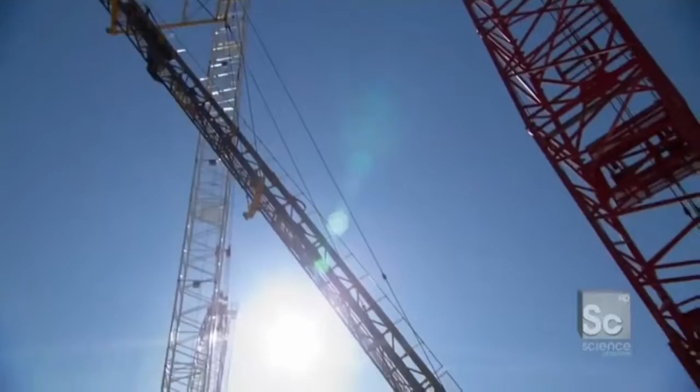Prior to Katrina, this wall was the only line of defense that those residents had. It was the primary line of defense for hurricane storm surge. Tell me what's different now. What's different now is we've taken a step back and looked at the larger New Orleans area, and we've actually moved the primary hurricane defenses from this location to areas 8 miles away.

8 miles from downtown New Orleans, they're building this. A 2-mile-long, over 150-foot deep flood wall that is fundamentally changing how New Orleans will fight hurricanes. It's unlike anything ever built. The largest surge barrier in the world, nicknamed the Great Wall of Louisiana, designed to hold back over 44 million gallons of water from an oncoming storm.

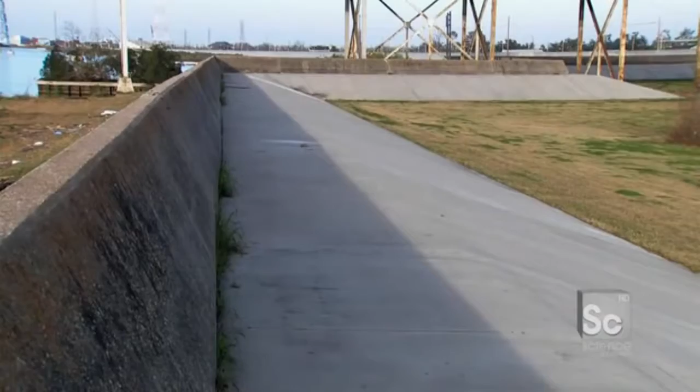Prior to Hurricane Katrina, stormwater flowed into New Orleans and was met by a 350-mile network of earthen embankments called levees. Located just 100 feet from people's homes, they held back the water, keeping the city dry. But when Katrina hit, the system was so overwhelmed by water, the levees broke in 50 places, flooding 80% of the city in just 5 hours' time.

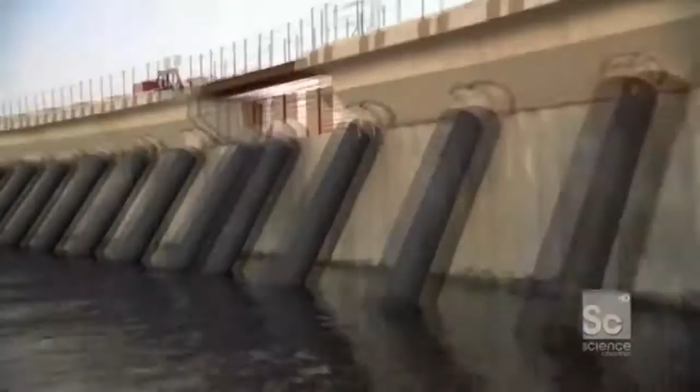To avoid this disaster happening again, the surge barrier is being built miles away from downtown New Orleans, where it can stop the water before it enters the city. Instead of waiting for the storm to come to them, for the first time, they are taking the fight to the storm. Is this a new way to think about battling hurricanes?

Nowhere in the world have we built a wall trying to keep out 25, 26 feet of water. No one's ever done it before. And this height here on a storm surge is unique. You gotta remember, the hurricanes that come to New Orleans are bigger, meaner, and there are more of them.

To hold back a 26-foot wall of water, the barrier is fortified by 628 batter piles. When the storm surge hits the wall, what pushes back and keeps that wall upright and strong are these guys right here. They're called batter piles, and they're basically 288-foot-long steel tubes inserted into the back of the wall that support it and transfer all the loads of that storm surge into the foundation.

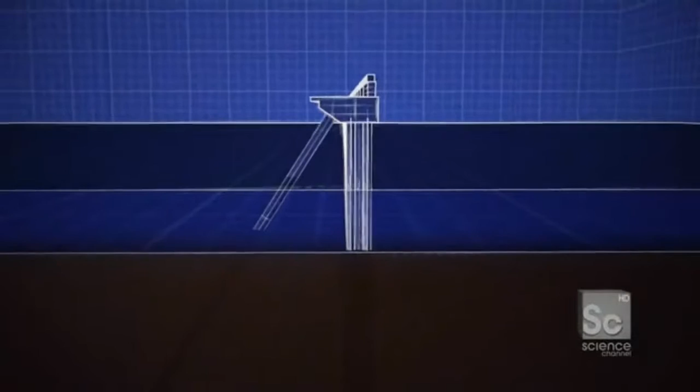Since there's no bedrock to hold the pile in place, over 80% of the wall is actually below the mudline. The deeper the pile is driven, the more friction there is to hold it in place. Each pile is almost as long as a football field and placed at an acute angle for added stability.

What'll be interesting about this lift is that this pile right here is horizontal, right? But in the end, we have to get this thing at a 57-degree angle to feed it into the machine called the leads. No one has ever attempted to drive piles this size at an angle before.

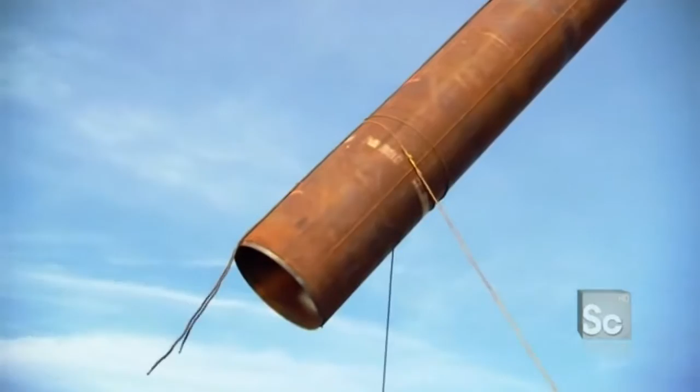To accomplish this engineering first, the Army Corps invented a massive 1,000-ton machine called the leads. Unlike traditional pile drivers that can only hammer vertically, the leads can hammer the piles at a precise 57-degree angle. And with 4 chutes, they can drive 4 piles in a row before moving on, saving almost 5 months of construction time.

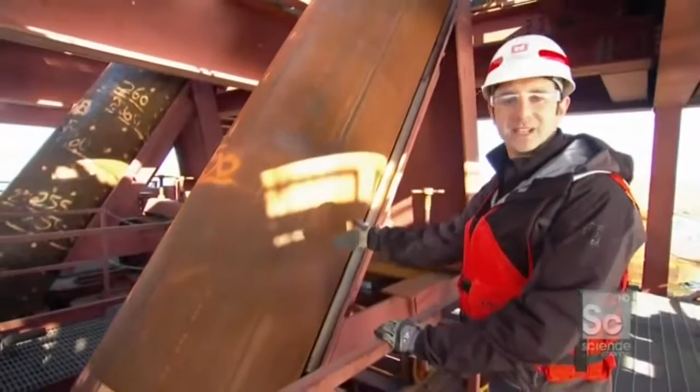So here it is, lowering it through the leads, right? The thing that's leading it right down this 57-degree angle, getting into position so we can start knocking this straight into the ground. Even the leads isn't big enough to handle a 300-foot-long pile in one go.

So they're driven in two sections. The first section is 158 feet long and weighs more than 13 tons. So Mike, as I'm looking at this slowly creep down into the earth, this is just sliding into the soil below, right? Into the mud, yeah.

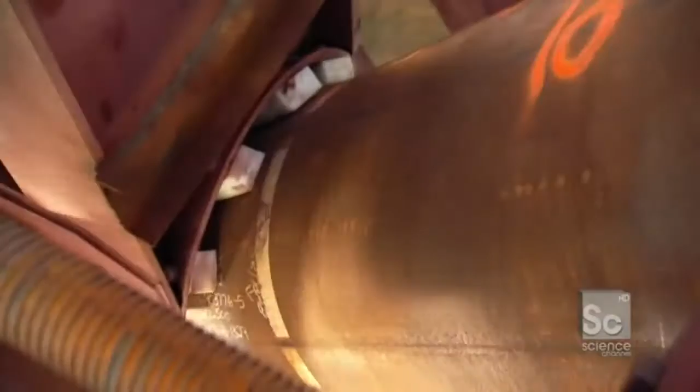I mean, there's really nothing down there, huh? Not much. I mean, it's soft. It's so soft that the pile sinks 38 feet in a matter of seconds under its own weight. After that, the friction from the mud becomes too great, so they have to use a hydraulic hammer. Do I run that hammer down? Absolutely. Time to drive the hammer.

So it's your job to control how much force this thing hits it, when it hits it, and how you drive the pile down. That's it.

So before sun sets today, we're gonna start smacking this thing and send it in? Right now, the next 2 minutes. Everybody ready, got the earplugs on, let's go. Let's do it. I got earplugs. I'm on. Let's start smacking it.

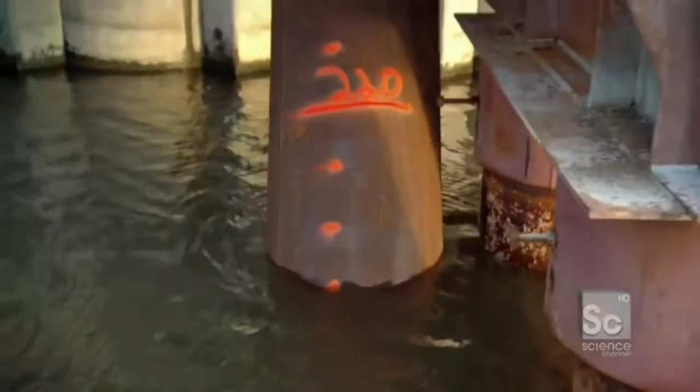So every time that smacks the pile, that pile gets pushed a little deeper into the ground. During the first 158 feet of driving, each blow moves the pile 10 inches. But as the pile goes deeper and friction increases, it takes 40 blows to move the pile that same distance.

So Mike, the first piece is now in place. Right. And now they're gonna bring over the second piece, which is that one right there.

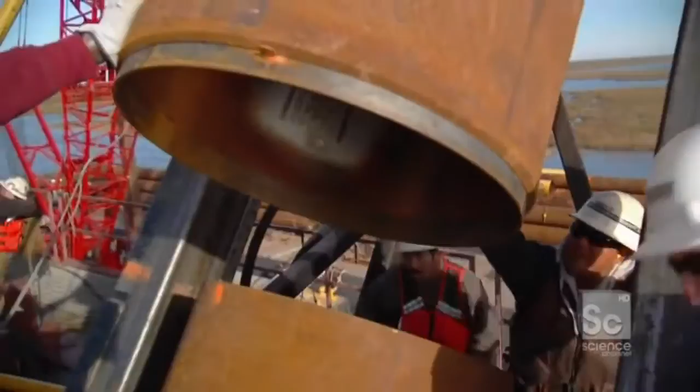Loading like a rocket launcher almost. They have to get the piece in, tamp it down, and line one end up with the next. Line it up, line it up! All right, so here it is, it's coming down. And you can see we're basically gonna fit this piece into that piece, have a little bit of an overlap, and that's what they're gonna weld together.

So if you look right there, you can see the weld's been completed. Those two separate pieces have now been spliced into one, and now that pile is 245 feet long. The weld looks good. Yes, sir. We're ready to drive it, put it on the ground. This is the last time we're gonna see this pile in the air.

So let's flip the hammer on and start smacking. Smacking it. Are you ready? Yes, I'm ready. Whenever you're ready. I'm ready. I was born to smack pile.

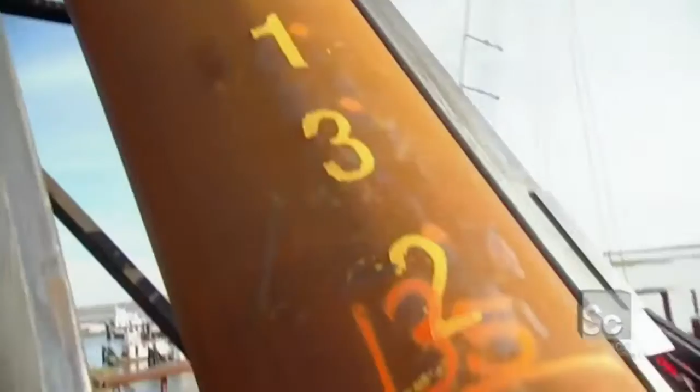It takes around 1,200 blows to get one batter pile into place. And to stay on schedule, they need to install 628 of them in just 6 months. A total of about 750,000 blows. Normally, a project of this magnitude would take more than 17 years to complete. To make New Orleans safe as quickly as possible, the Army Corps is attempting to finish the surge barrier in just 3 years. To pull off this incredible feat, this crew has to work through hurricane season.

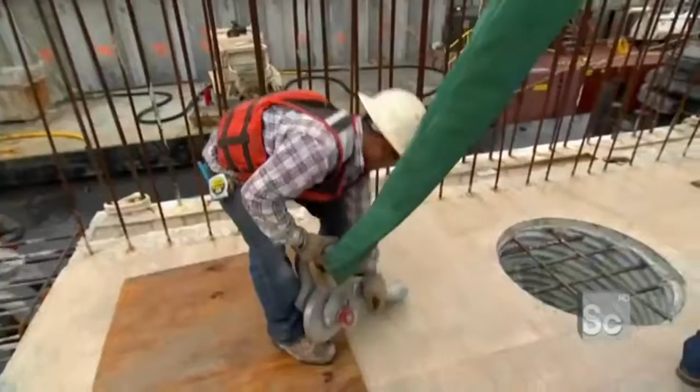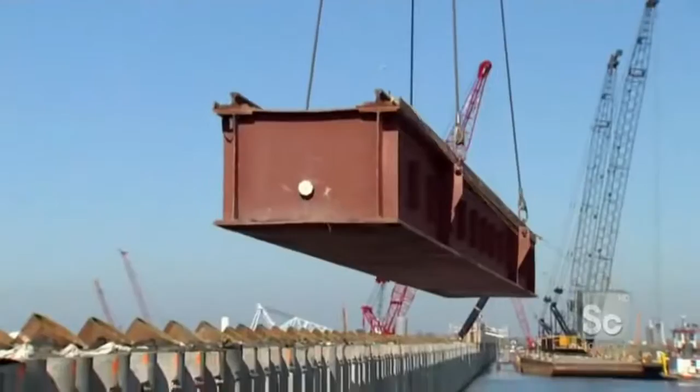So engineers came up with an innovative solution to get the job done right and done fast, even in rough waters. One of the biggest challenges when you're working in the middle of a lake is having a level surface on which to work, because barges move and tugboats pitch and roll as well. So in order to have a flat surface to accurately work, they developed that system right there called a trestle. It's a semi-permanent track that moves along with the wall construction. A trestle is basically a huge railroad track anchored into the lake bed, providing a stable workplace for large machinery.

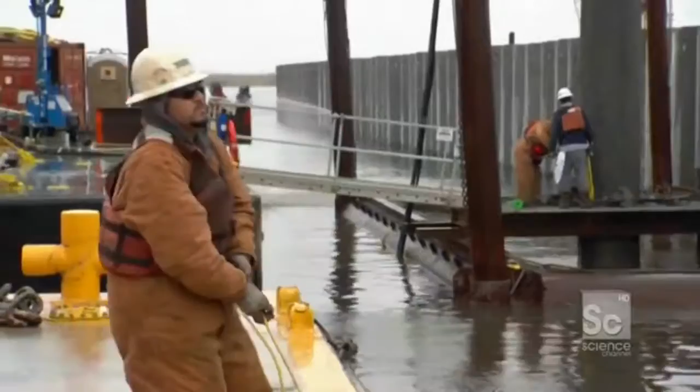The project has 1,000 feet of track for the entire 10,000-foot-long wall. So to keep construction moving forward, the trestle team has to leapfrog 50-foot sections from one end of the site to the other, up to 6 times a day. 50 feet of trestle track's about to go from this barge up in the air and extend our construction platform another 50 feet. Each trestle segment has to be aligned seamlessly with the existing track. The gap can be no more than 3 millimeters, or about the thickness of a shoelace.

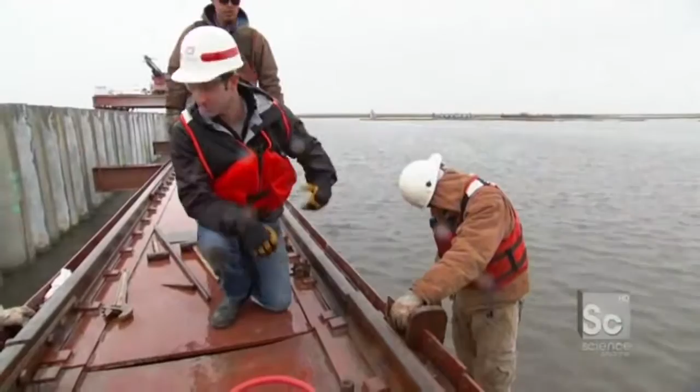Okay, so now that we have the trestle track, generally speaking, in place between the two beams, let's walk on the trestle. I'm standing on the pre-existing trestle track, and this right here is the new piece of track. As you can see, we have a big gap. We'll use this plate right here to put it on either side of the track, put the bolts in, and bind the track together.

6 bolts need to be in place to ensure a solid connection between the trestles. The issue is we have 5 out of the 6 bolts lined up, but one side is slightly higher than the other, so we're having a problem getting in the final bolt. The holes are about 3 millimeters off. In order to make that space to get it through, we're going to torch it out.

Would it not have made sense for me to move before he started? And on the plus side, it's really cold and rainy. My right hand is much warmer than it was a minute ago.

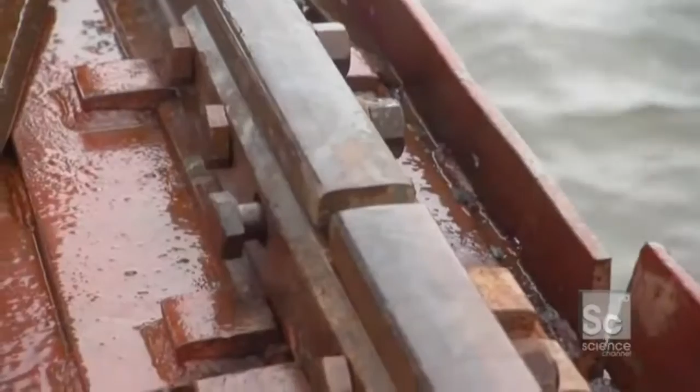Well, after cutting, torching, and hitting, and just generally some emotional consternation, the sixth and final bolt, give her a smack, is through. This track has now been extended 50 more feet. The construction site will extend. Can we go home? We're finished now?

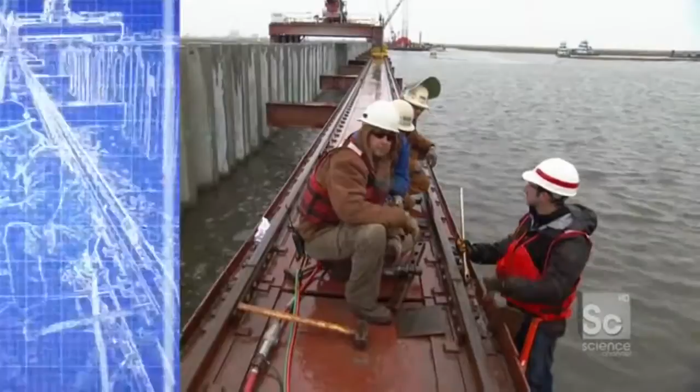Up next, building new lives and new hope in the 9th Ward, with houses designed to fight back against the worst Mother Nature has to offer. These houses are being built to survive another Katrina.

When you think about what took place in New Orleans, you of course think about Hurricane Katrina. But the truth is, the actual damage that took place wasn't from the hurricane, but rather from what the hurricane created, something called a storm surge. A storm surge is a wall of water pushed out in front of a hurricane by high winds and low pressure. During Katrina, it caused waters to rise more than 20 feet, overwhelming the existing hurricane protection and flooding almost the entire city.

Katrina's storm surge was responsible for 90% of the destruction in New Orleans. And hardest hit was one of New Orleans' poorest neighborhoods, the lower 9th Ward.

I was actually here filming 5 years ago, right after the event, and it was harrowing. There were houses that were just blown clear off their foundations. Others were torn in two. I saw a house that was actually sitting in a tree.

5,000 homes were lost in this neighborhood alone, and less than 20% of its residents have come home to rebuild.

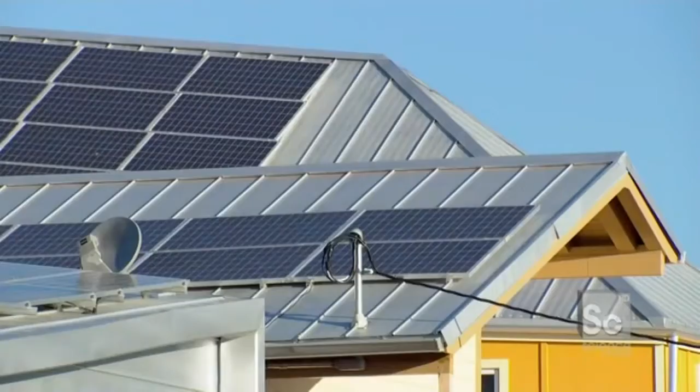It's incredible, it's an amazing project. No matter which aspect we look at, there's something incredible going on. These homes are re-engineering the lower 9th Ward and transforming it into one of the most hurricane-resistant neighborhoods on the planet. But one of their biggest challenges isn't wind and rain, it's the ground itself.

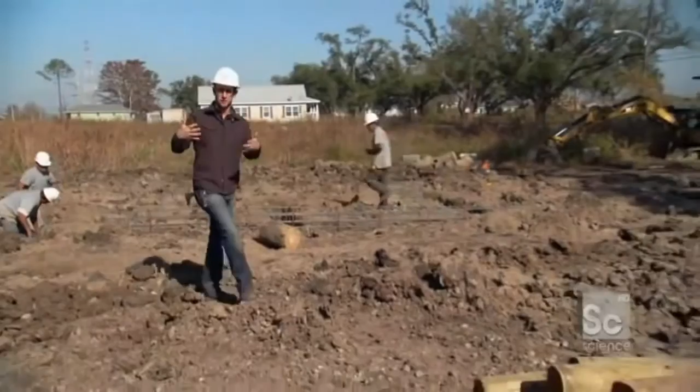Like most of New Orleans, the lower 9th Ward is built below sea level, which basically means the ground below me is a big swamp. You build a house here, over time, it's going to sink. So to prevent that, the Make It Right houses begin construction by driving these massive 40-foot-long piles into the earth.

This is what they had before Katrina, and this is what they're getting right now. Right, exactly. So these are built to last. These houses are built to survive another Katrina. These piles are revolutionizing how homes are built in this flood-prone area.

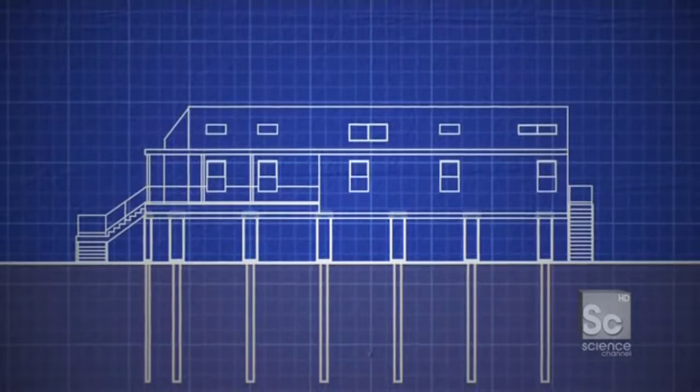Previously, homes rested on top of cinder blocks. When a flood came, the house would be lifted off the blocks and sent crashing through the neighborhood. But now, these wooden piles stabilize the soft soil so it can support a raised concrete foundation. It actually attaches to the house, strong enough to keep the home in place, even in floods more than 12 feet high.

Chris, how do you get a 40-foot pile rated to carry 7 tons into the swamp? You use that machine over there, called a sonic side grip vibratory driver that puts out 50 tons of centrifugal force, and it'll push that pile underground in about 2-3 minutes.

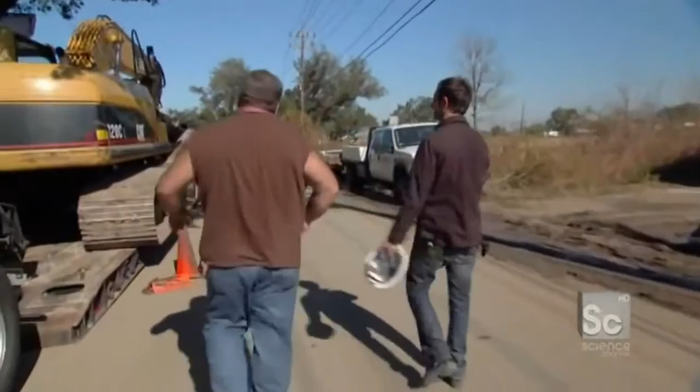So this is it, huh? This is the machine. It's like a construction action hero. My God. Tony, why don't you spin her around so we can look at her? This has got a kind of a Mad Max Beyond Thunderdome vibe to it, you know what I mean? Yeah, I never get tired of watching it work.

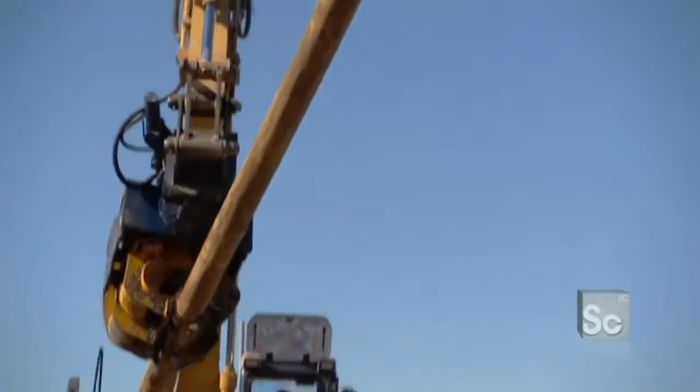No one has ever used a pile driver like this to install foundations in the lower Ninth Ward. Its unique articulating arm can grab, lift, and drive the pile all in one shot. The work gets done 3 times faster than if they used a conventional pile driver. Grabs it by eye, swings it into place like it's his extended arm, puts it right down in a matter of moments. Tony says the only place he really feels at peace is in that machine. You can kind of see that too, right? Yeah, oh yeah. To lift and move a pile requires careful coordination of 6 controls all at once.

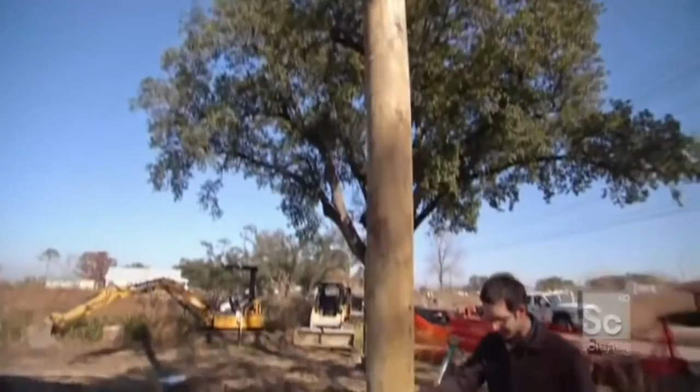Tony's located the pile right in the corner of the foundation. We have a little circle mark for him, and he's just gonna put this thing dead smack. Perfect. He's lined up, he's level. Now it's time to vibrate. Tony, you ready?

You literally feel the ground shaking, within like a 5-foot radius around Tony's workings—like my feet, my toes, my back. I'm itchy right now from the vibrations running through me.

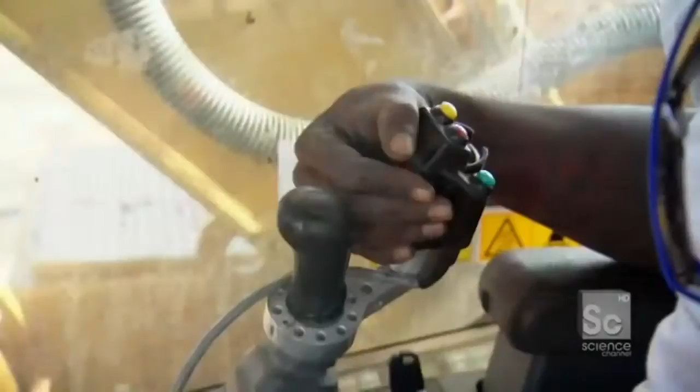So now what I'm standing on, even before the foundation gets here, is 40 feet of pile below me. And it's from this point the house now begins.

Is it hard for a rookie? The hardest part's picking the pile up. Let's give it a go. I'm gonna drop some piles. Okay, so you're Tony. Yes. I'm Danny. Nice to meet you, Dan. How you doing, man? I'm okay. We're gonna switch jobs. Yeah, you do the yelling and walking around and talking and not doing anything productive. Sounds like a winner. And I'll do the work. Sounds like a plan. All right, Tony.

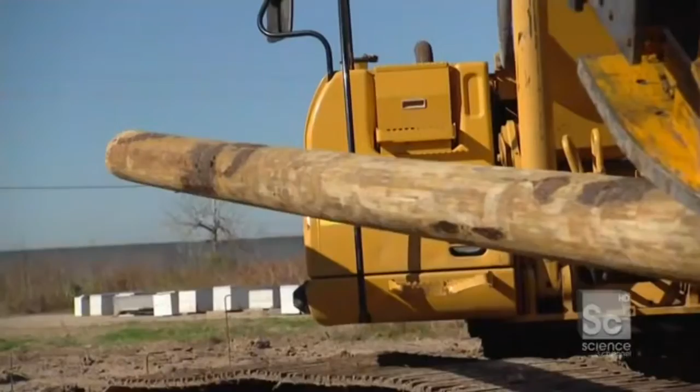Swing your left over. Oh! So close, it was like I'm about to eat it. It was like, oh, here we go. Open, open. It's like playing the violin. Come here. Oh! It's in my clutches. It's coming up, I got a good grip on it.

Chris, watch this, man, this is gonna be a little piece of magic. Can't beat that. How's she looking? First time out, that's not too bad. Now tell me something, you're from here, right? Born and raised here. So regardless of the next event, next storm, if it happens again, you come back? We're coming back, this is home. This is life, this is reality here. I come here sometime with my kids just to show them the houses, you know? This is what we doing. We bringing people home. It's good stuff. Thank you, man. It's amazing.

Up next, putting together the strongest wall ever built, and we're gonna literally thread the needle in some of the worst soil conditions in the world.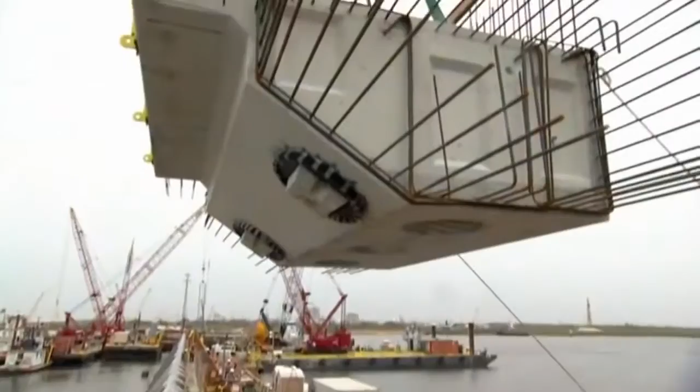Since it was founded in 1718, New Orleans is a town that's been working against the elements, primarily because 80% of this place is located below sea level. But for the first time, New Orleanians are trying something new, working with nature instead of against it.

New Orleans is built on top of a giant marshland, which for millions of years naturally absorbed thousands of gallons of rain and floodwater. Today, most of that spongy marsh is covered by pavement, causing significant problems for this flood-prone city. In a typical situation, when it rains, what happens to that water? How does New Orleans deal with it?

That water runs off, goes to our curb and gutter, goes about 8 blocks to the north of us, and is pumped over a levee at about 2 cents a gallon. That's expensive, it's time-consuming, it's a problem if the pumps fail. It's not sustainable. And frankly, relying on the pump station, relying on the city hasn't always worked so well for these citizens.

Over half of New Orleans is located below sea level. This paved city is basically a big bowl. When water comes in, the only way to get it out is with pumps. So when the pumps failed during Katrina, the lower Ninth Ward was left underwater for more than 3 weeks. We're in a situation where our community has a real fear of water, and it's a valid fear of water.

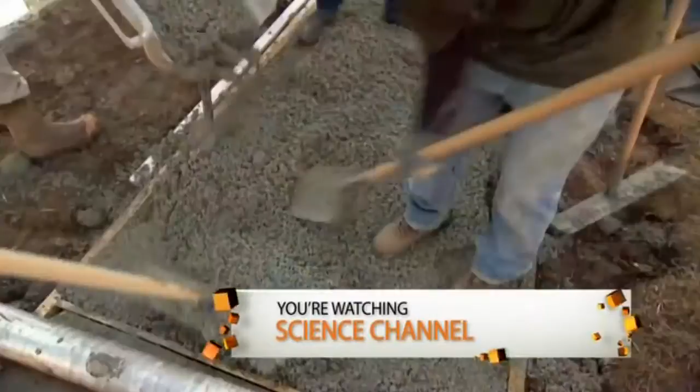The folks in this neighborhood have a different mindset on water, and we're trying to change that paradigm. To make sure this neighborhood is not left underwater again, engineers have found an innovative solution to radically reduce the need for pump stations, called pervious concrete.

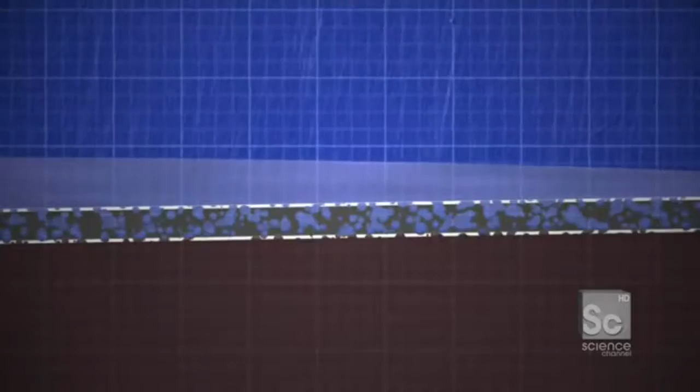As water runs off of our site, it does the opposite of what typical pavement does. Instead of a giant table that tilts water and flows it to the curb and gutter, this is a giant sponge that accepts rainwater, stores it in the concrete and below, and doesn't hit the curb and gutter and run off our streets. So you're telling me this driveway and this sidewalk, when rain hits it, it's actually going to absorb that water? Correct. Unlike conventional concrete that repels water into the storm sewer, pervious concrete absorbs it. Filled with tiny air pockets, it allows water to flow through it and into the native marshland below, where hundreds and thousands of gallons can be stored naturally.

Do you have any actual finished stuff that we can see? Yeah, we have a little mock-up right here. It actually does look like a Rice Krispie treat.

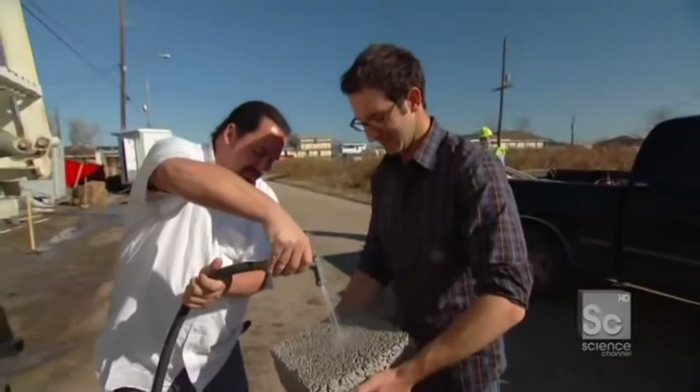All right, let's simulate right now. I'm a driveway, you're a rainstorm, and the rain's coming in. It just stores up, it's just eating it like a sponge. And then it comes out the bottom. Look at that. Now, typically, all that rain we just dumped down would go from this driveway into the sewer system and have to get pumped out. Correct. At ultimate build-out, we will be saving several hundred thousand gallons of water hitting the storm sewer every rain event.

And that all starts with you, me, and a bunch of guys pouring some concrete. Absolutely. Here it comes.

It doesn't look normal, right? It's much drier, thicker, and chunkier. Because of this consistency, pervious concrete pours much slower than conventional concrete and dries much faster.

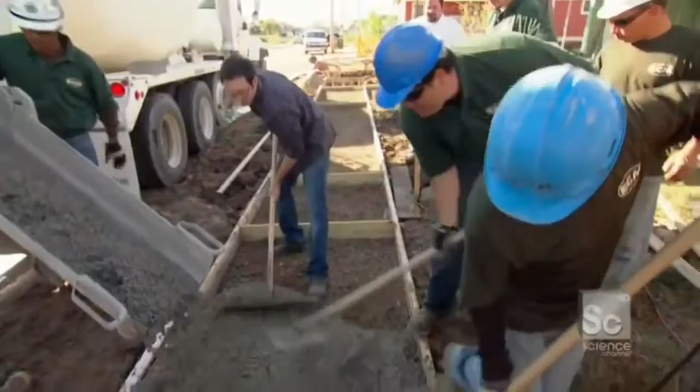So we have just 15 minutes before the concrete sets. We're actually trying to push the concrete out, but then actually compact it. Yeah, we're gonna compact it. We're gonna pour it 3/4 of an inch higher.

Got it. What I'm doing right now is sort of the opposite of what you do with normal concrete. Typically, you vibrate concrete to get the air bubbles out. Here, we actually compact it tight to get lots of air bubbles inside of it. That's how the water goes through it.

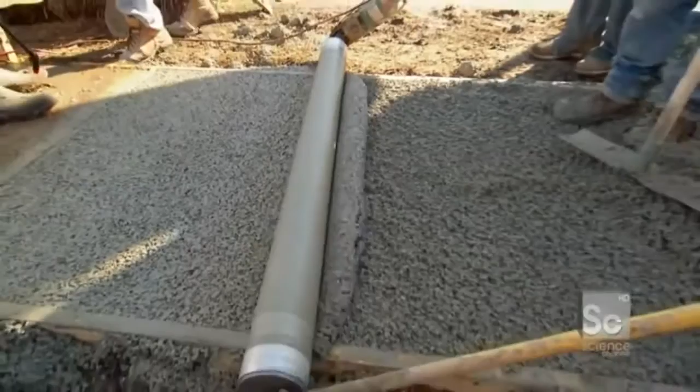Compacting the concrete is the most critical part of the process. If it's compacted too tight, it won't absorb the excess water. Too loose, and it'll crumble.

To do the job quickly, they use a specialized 150-pound roller called a screed.

Ready? You want to pull it? Yeah, now I'm pulling it. All right, come to me. Here we go, stay with me. Here we go, nice and slow.

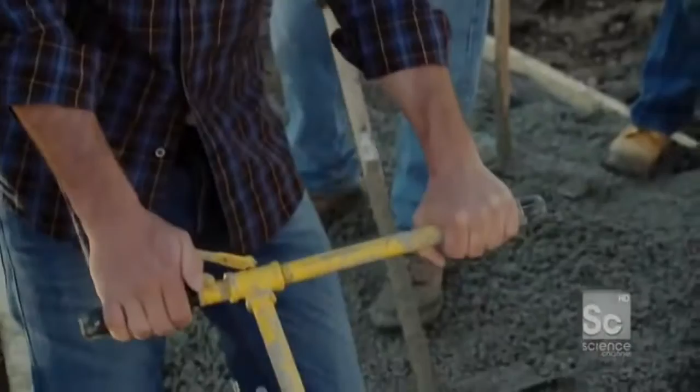I'm making pervious concrete. You know why? Because I don't want concrete to push water into the sewer system, do you? No, you don't. Good job. That was perfect.

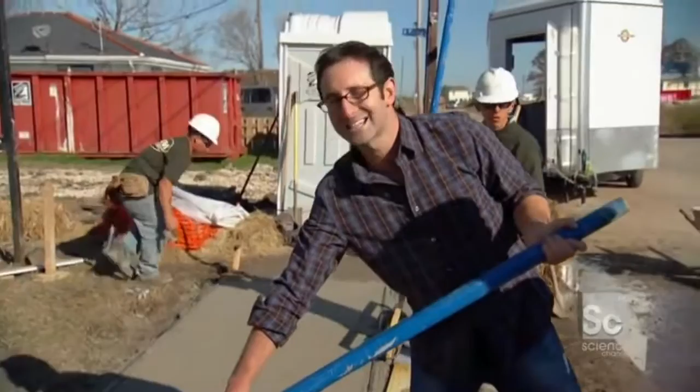Beautiful. And although it may not look like it, this is actually the finishing touch. This is the layer of concrete that you'll see every time you walk down the Make It Right streets. Big, hard, dense Rice Krispie treat that all the while is sucking up the water and making sure it does not go into the streets. I love it, man.

The concrete will absorb 5 gallons per hour, using Louisiana's natural marshland to keep the neighborhood dry. That same absorbent soil, however, is the biggest problem for engineers building the 2-mile-long surge barrier.

What I'm fascinated by is that you want this to be strong and heavy and beefy. But if it's too heavy, the soil's so weak your wall will actually start sinking. That's one of our challenges. We need a very strong wall, but you also need a light wall, comparatively speaking, for concrete, of course.

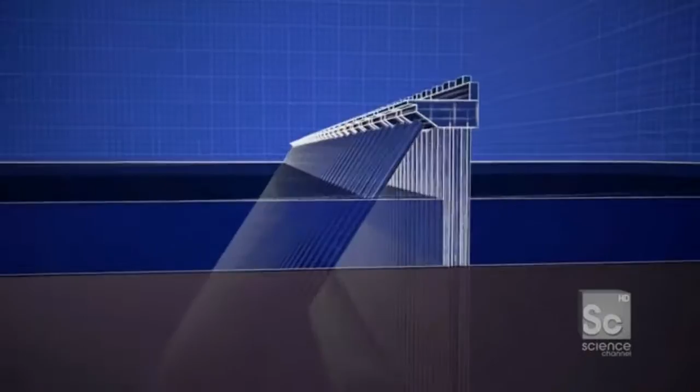You can't build a Great Wall of China here, because the massive weight of it would simply sink out of sight. Instead of building one solid structure like most levees or dikes, engineers designed the New Orleans surge barrier as an A-frame. It uses half the material, but it's actually stronger than a solid structure. The key to its strength: 330 concrete caps placed at the top of the A. They link the vertical piles to the batter piles, directing the force of the storm from the front of the wall, through the batter piles, and down into the marsh, dispersing the loads and keeping the wall strong but light.

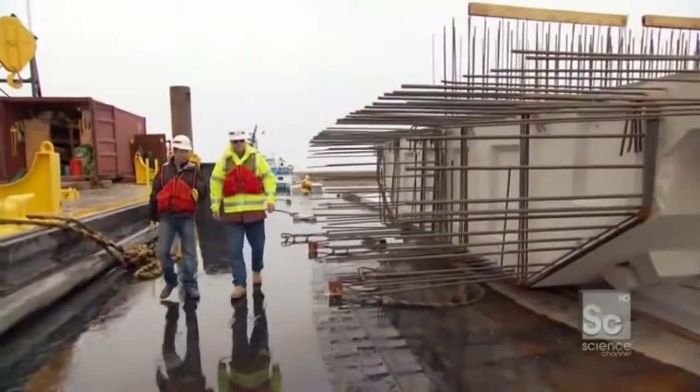So Vic, when the soldier piles are in, the batter piles in place, what ties them all together and makes them one structural system are these guys right here. That's right, these are caps. So essentially your chain is as strong as your weakest link. Yeah, absolutely, and this is the link, essentially. This is what connects the two types of piles. This 96-ton piece of concrete, very high-tech design, transfers that energy.

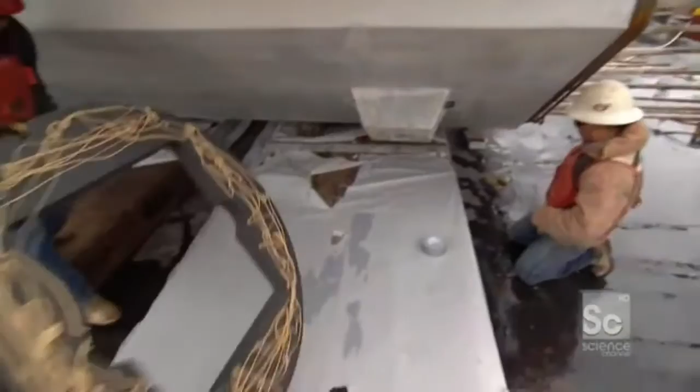Before the cap can be lifted, each joint has to be reinforced with a waterproof seal installed between the cap and the piles. This is the seal. It's like the gasket, to hold the concrete on, keep it tight, to make sure the batter pile meets the cap and you get one tight joint.

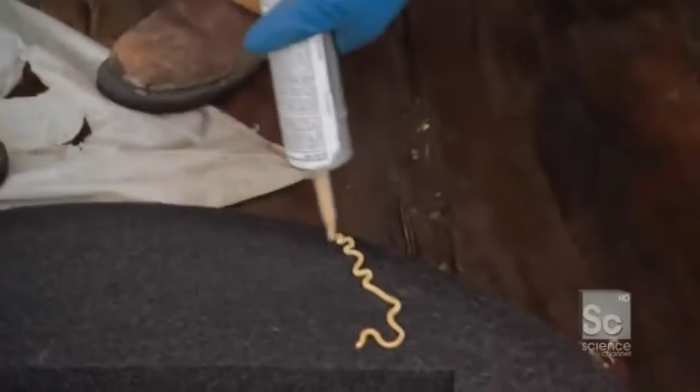The seal between the cap and the batter pile is created by the weight of the 96-ton cap. Luis, AKA Jackson Pollock of the glue.

Luis uses construction glue to hold the seal in position while the cap is lifted up onto the wall. All right, Luis, let's pop it on. Okay.

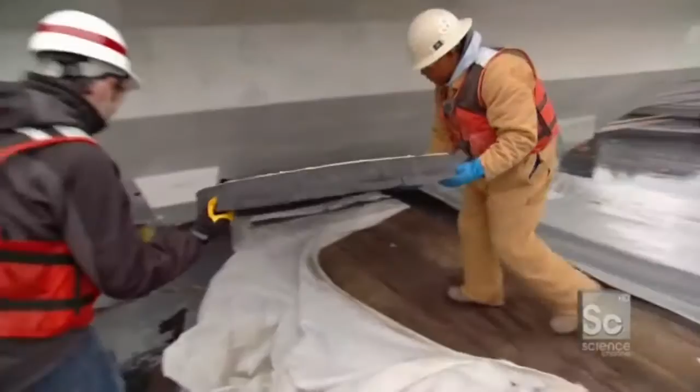96 tons, holding back 200 billion gallons of water. And during construction, duct tape.

How's she looking, Luis? Looks pretty good. Pretty good? Yeah, looks good. Very good? Very good, I say.

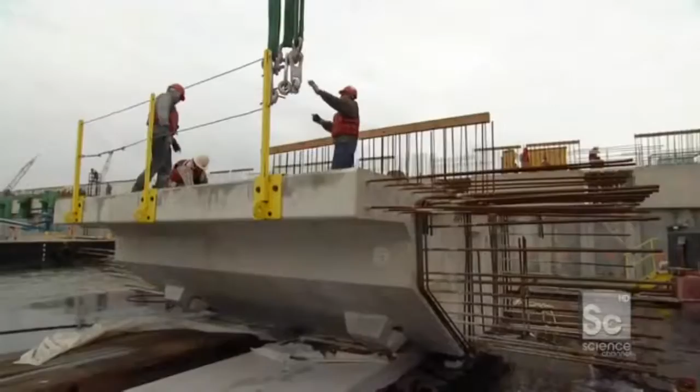Okay, that's it, our full shackles are attached. This now 96-ton cap piece is about to get lifted up from this barge and placed atop the flood wall. The 300-ton crane is located on a barge, causing the cap to bob and swing during the lift, making precise alignment a real challenge. We're going to literally thread the needle, take these 3 shear pins which extend the soldier piles, and put them right into the cap, fusing them into one.

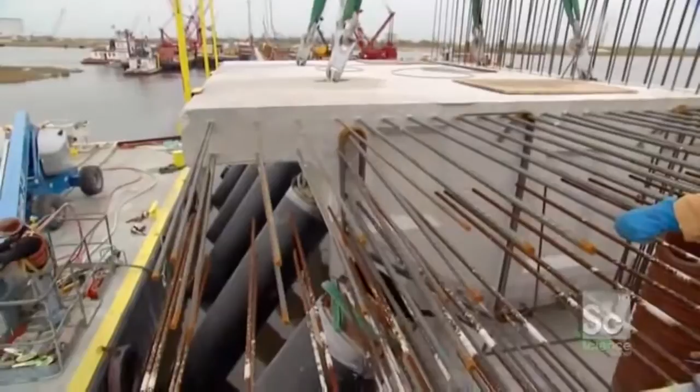Once in place, the cap transforms the wall from 5 separate elements into one structural unit for the first time. Even as it comes down a few inches, 96 tons or otherwise, a little bit of motion can still move the thing. So we're shifting over just a couple millimeters.

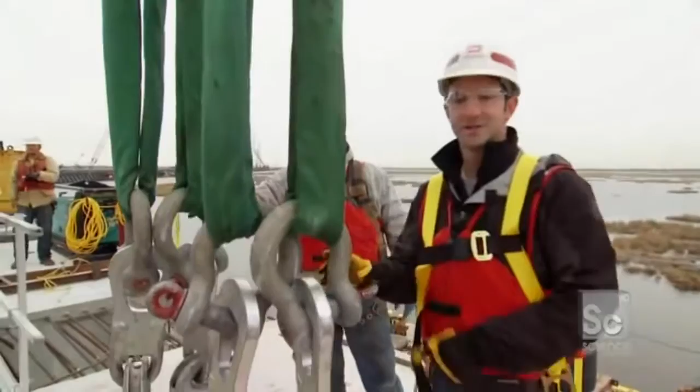So as you can see, the cranes are detached, sending the shackles home. This is in its final location, 96 tons lined up within millimeters. One down, move on to the next one. Up next, we're going, come to Papa.

Racing to fuse the wall together with one of the fastest concrete assembly lines ever designed. You can open it on up now. Open it on up. But first, what wind speed can the new Make It Right houses in the Lower Ninth Ward safely withstand? The answer after the break.

The answer to our trivia question: the Make It Right houses can safely withstand 200 mile per hour winds, enough to survive a Category 5 hurricane.

Given the amount of investment that's going into saving this city, sometimes the question is asked, should we save New Orleans? But it's important to point out that this is more than just Mardi Gras. New Orleans represents a quarter of all domestic oil production for America. The Port of New Orleans is one of the most important ports we have. It's the very gateway for all shipping traffic to the Midwest. This port is so important, it's been defended for more than 200 years.

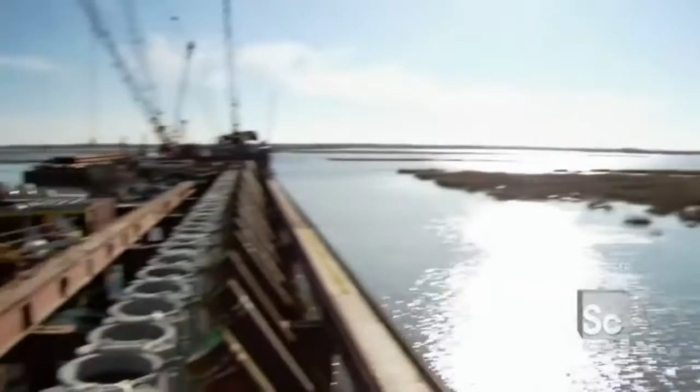The surge barrier is designed to continue protecting the port and the 2 million people in and around New Orleans for years to come. We're constructing a wall here which we know is pretty robust. Several hundred years from now, this structure will still be here, because nobody's going to take it out. It's not coming out anytime soon. So the reality is this will provide viable surge protection for the city of New Orleans for a long time to come.

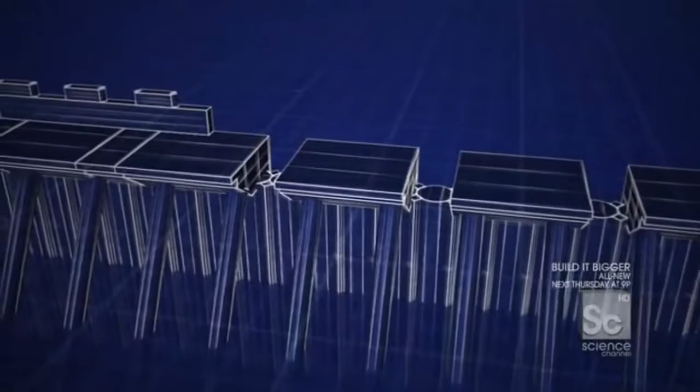This massive wall is engineered to last for 100 years, but they have to build it in just 18 months. You guys have basically designed a system for speed. Yes, for speed, big time. Engineers have been thinking about this for a long time, we're just making it work. To save time, they're using an assembly line. First, a crane drops in prefabricated concrete caps, leaving a 6-foot gap between them, not wasting time lining them up. Then behind them, another crew fuses the caps together with poured concrete, smoothing out any misalignments. This system shaves off more than 6 months.

So essentially, rather than have to worry about fussing and getting it just right with millimeter tolerance on site, they just keep moving. Because even if he's a little bit off, misses the mark a little bit, Rusty comes in and just fixes it up. That's it. It's like Legos with a little bit of silly putty in the middle. That's it. Right? Yeah, you got it.

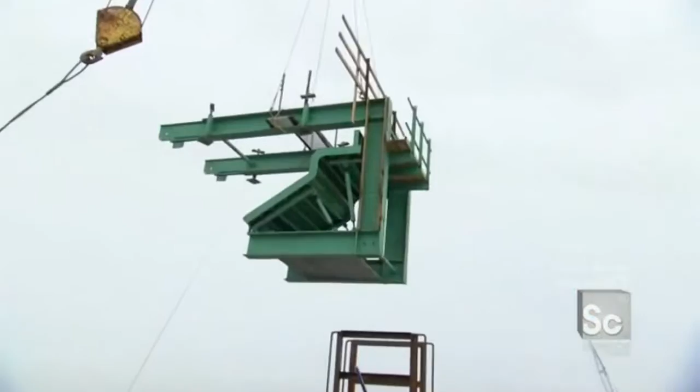To fill the space in between the caps, they pour the concrete into custom formwork. What we're looking at right here is essentially a 10,000-pound mold, a shape that we're going to bring into place, which is shaped exactly like the precast caps. Put it in place, and bring 2 precast caps, form together as one.

Cabling on down, a little bit. All right, we got our hands on it. Hold that. A little bit of right swing. Down easy, 6 more inches. A little bit, all right, hold that. Another shot, boom up now. Booming up. You done this before?

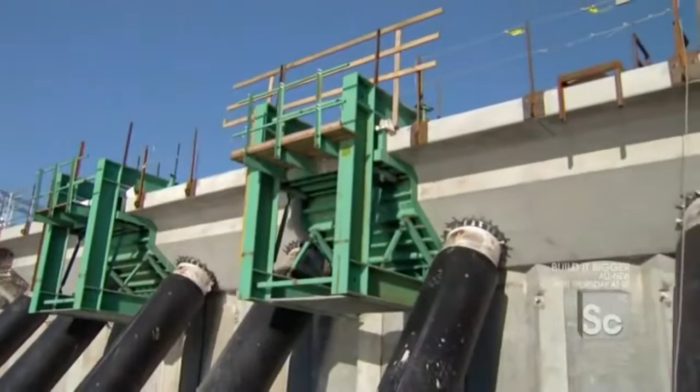A few times. The formwork snaps into place with alignment pins, matching up perfectly with the 2 caps on either side. This snug fit allows the poured concrete to smooth out any minor errors in the placement of the cap. Okay Rusty, so when I got here about 15 minutes ago, there was a big gap in between these 2 pieces of precast. Big hole. Form is now on, both of them. Done incredibly quickly. Yes, tighten up the bolts, put in the pins, and then pour some concrete.

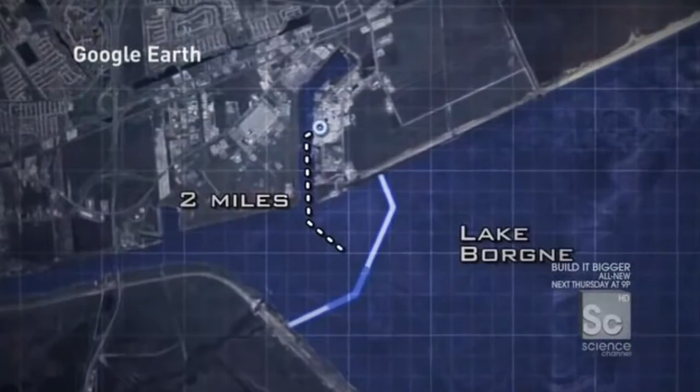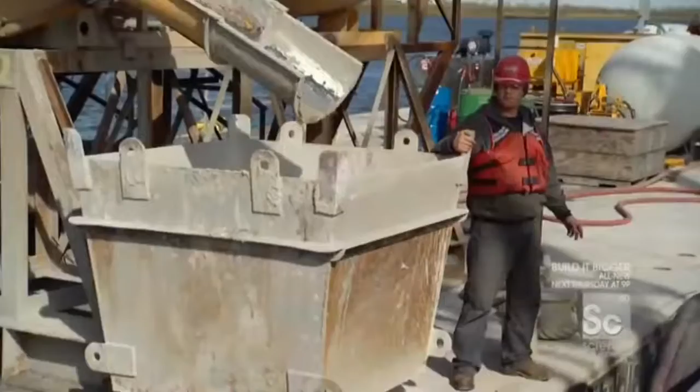The team now needs 36 tons of concrete to fill the gap. But they've got to transport it from the concrete plant 2 miles away to the construction site in the middle of Lake Borgne, all before it starts to dry. There it is, coming around the corner right now. So here's the concrete. It takes about 15 minutes from where we're at right here to get to the dock. And then naturally it takes them about 10 minutes to load and then 15 minutes back out. Since they're losing about a half an hour in transit, Rusty's team now has a narrow 60-minute window to pour the concrete before it cures.

We're going, we're going right now. Come to Papa. To fill the gap, they have to lift 9 bucket loads in under an hour. You can open it on up now. Open it on up. That's it, let's go get another one. That's it, we just keep going. Well, there it is, as fast as she came, she went. 2 yards of concrete in the hole, down the chute, and in the space. 2 yards go out, 2 more yards are coming in. It just comes in fast. Coming on down, here it comes.

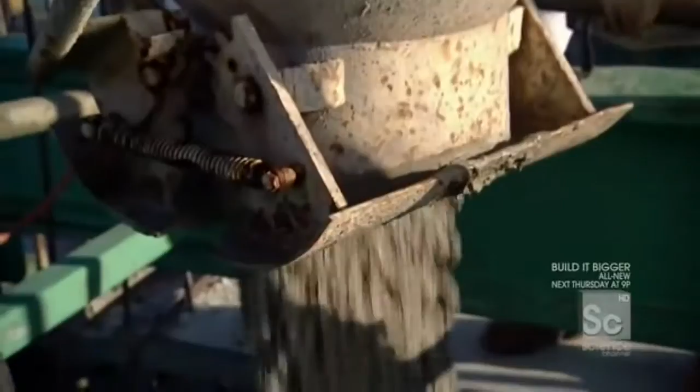Once the gap is filled, it'll dry in 2 days, permanently fusing the caps into one monolithic concrete structure. All right, whole thing took us, what, 15 minutes? Probably 15, 20 minutes. When you're doing a job like this, pouring this concrete, it's not hard to remember why you're doing it. Everybody out here enjoys coming out here.

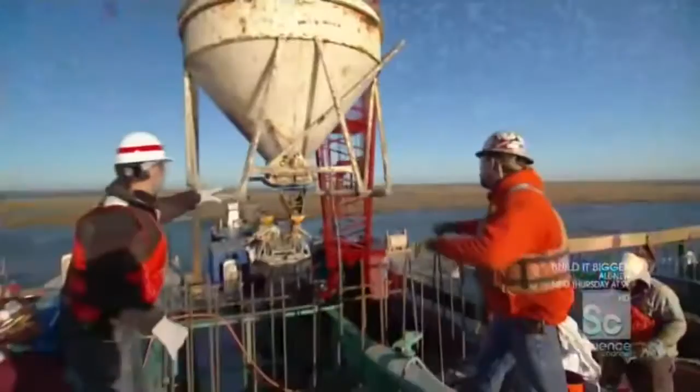But we are building it for a reason and for a cause, like I say, to save people's lives, property, all that. You get a sense that this thing is done right, this wall gets done in time, this city's gonna start to come back? Oh yes, I believe that 100%. Yeah? Yes. This innovative concrete assembly line is giving New Orleans a barrier that will act as the primary line of defense.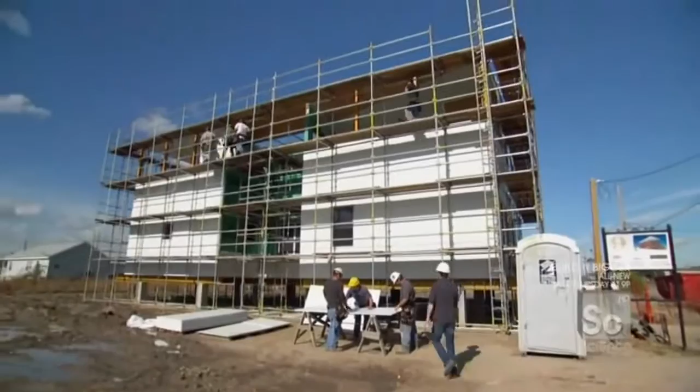On a smaller scale, another revolutionary type of concrete is being used as a second line of defense to design homes three times stronger than normal. The design of the Make It Right houses is to survive a hurricane, but also to last the test of time. So instead of wrapping them in traditional wood siding, which rots over time, they're trying something new. They're wrapping these houses in cement, using something called HardieBoard, a cutting-edge siding made of compressed cement designed to last over 50 years.

So what do we have in this environment that bangs up the siding so badly? A lot of rain, humidity, storms. You're in the Gulf South, a lot of moisture. So the outside of these houses are kind of getting slaughtered.

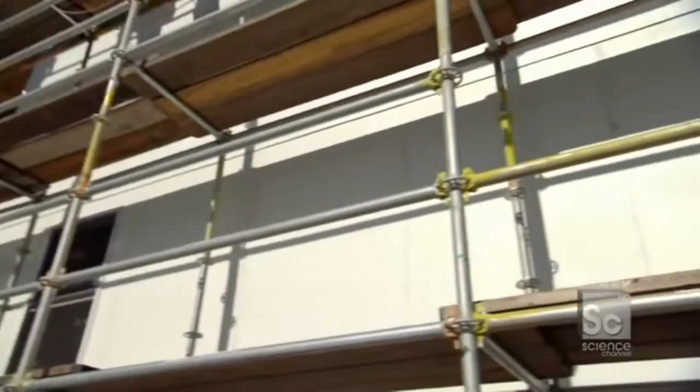Absolutely. And so what's different about this cement board? It will not rot away. This siding is made of an innovative compound that does not mold or rot when wet. Unlike traditional houses that have to be demolished after a flood, this house will simply dry out in the sun.

But in order to do its job, the siding has to stay on the house, even in Category 5 winds. Because during a hurricane event or any strong storm event, there's that suction where they actually pull the skin off the building. If that corner was to come off during a high wind, it would take that sheet, and probably that sheet, and keep on going.

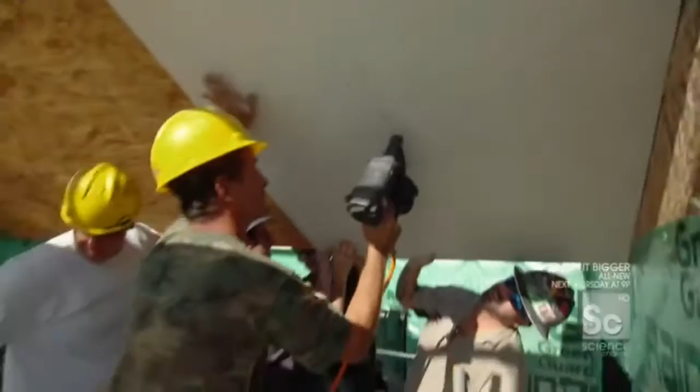They've calculated the position of every nail to ensure the siding is windproof. There's something tank-like about taking a house, wrapping it in a kind of thin cement frame, and keeping your nail patterns hard like rivets. Absolutely, like armor plating. This house is going to be here for a long time.

So how do we install the cement fiberboard? We've got some guys up top getting ready to install some right now. It's only a half inch thick, but this 4x8 piece weighs almost 80 pounds, twice the amount of traditional wood siding. There it goes. Cement board to the sky.

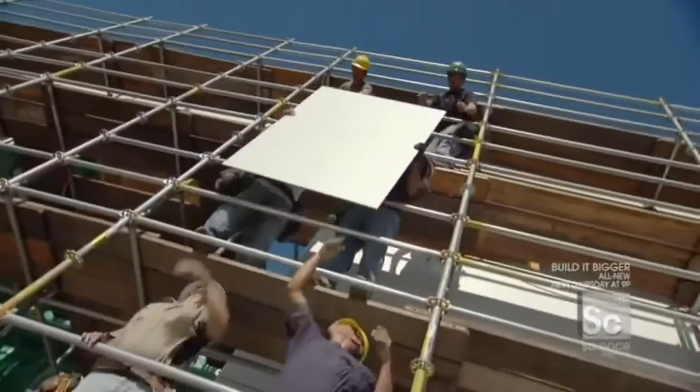So I'm now standing at the third floor of the house, and what you're looking into is actually an outdoor covered deck. And it's on this underside of this covered area we're going to apply this board.

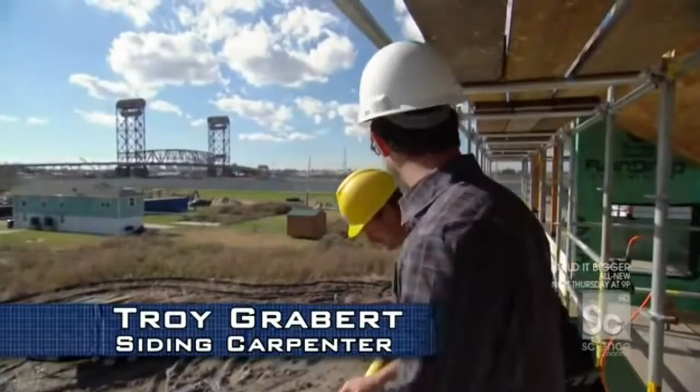All right, fellas, how you doing? Watch your feet. So you're from Louisiana? New Orleans. An amazing place, nice weather, sick architecture. Oh, and heavy cement board. Yeah, we're just going to kind of roll it over. It takes 6 people to position this single panel. All the way over? Yep.

It has to be perfectly flush with the previous board in order to form a windproof seal. No, a little higher, come on up. There we are. Who's got a nail gun? Right behind you. Far side over here. Up top? Yep. That is on pretty damn tight. And that's it, look at that.

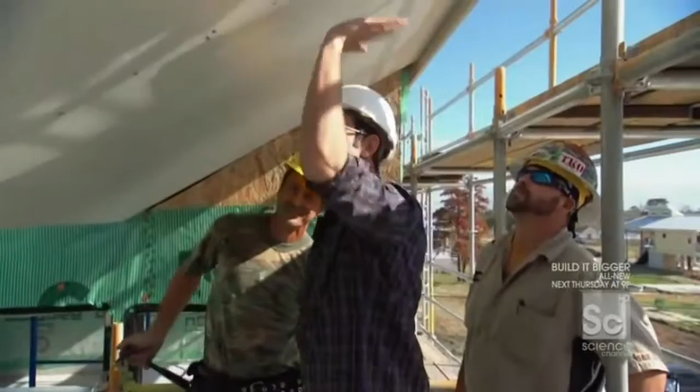That quickly, about 8 feet of siding, the very outside of the house, what will keep rain out of this thing, keep it dry, and lasting 50 years. Isn't that right, Fred? 50 years. 50 years. Once they put paint on there, it should last a while.

Coming up, finishing the world's largest surge barrier with a medieval castle-like design that can slice through 100-foot waves. You look at it, you think it just looks cool, like you got archers shooting bows and arrows. But there's a reason behind it. There's a reason.

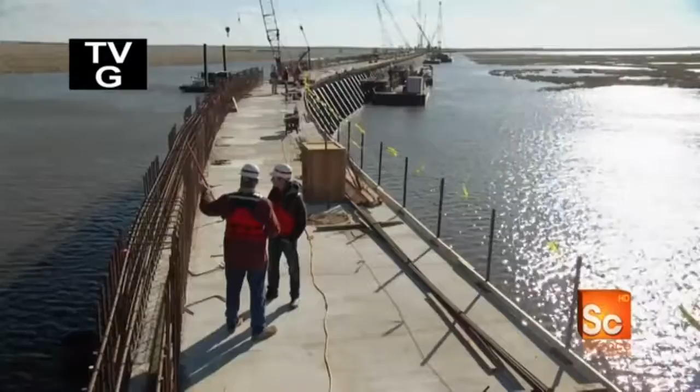New Orleans' new 2-mile-long surge barrier will give residents much-needed hurricane security. But it's difficult to rebuild with confidence until it's done. With the next hurricane season just 9 months away, this construction team is working around the clock to finish in time.

Well, it's about 8 p.m. The sun is set, the moon is out, and I'm going to work right now. Given this non-negotiable deadline of finishing this wall before hurricane season 2011, the guys are not just working 7 days a week, but also 20 hours a day.

Rick, Max. Yeah, father and son. Formwork crew. Yes. What is it, the graveyard shift? Just about, yes sir. It falls to the night crew to finish one of the surge barrier's most crucial elements, the parapet wall.

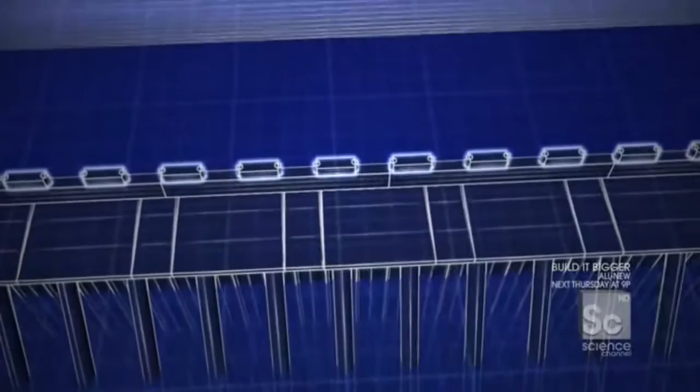You look at it, you think it just looks cool, like it's a castle thing, you got archers shooting bows and arrows. But there's a reason behind it. There's a reason. It's actually part of the system that beats down waves. While the lower part of the wall holds back the storm surge, it's the upper part of the wall that takes on the massive waves on top of the surge. Its castle-like notches are designed to chop big waves into smaller, less destructive ones that splash harmlessly on the backside of the wall, preventing millions of gallons of water from ever reaching the city.

In terms of what's actually fighting the storm and fighting the waves, this is what does it, right? This is the final edge of this thing that's actually going to hold back the water. That's it. And we're pulling off that form tonight. You're going to see what it looks like when we pull it off for the first time. The parapet wall is made up of 2-foot-thick concrete poured each morning.

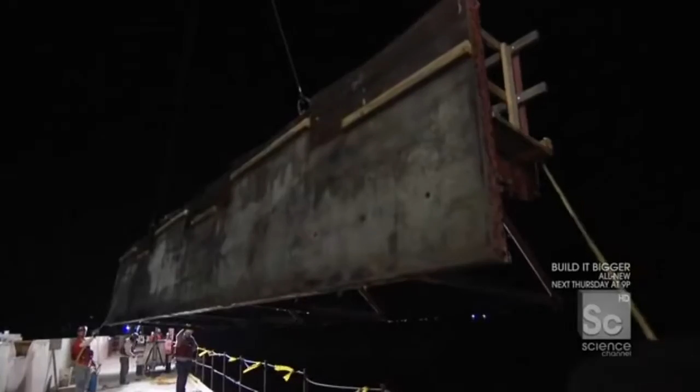To keep the daytime crew on schedule, the night shift has to remove and reset 2 of the massive 36-foot molds in just 6 hours. So by day, they place the concrete. At night, we pull the forms, we set the forms. Next day, they come back, they pour the concrete. On and on, it's ongoing, leapfrog. Got a mile and a half of it to do.

We got to get busy, stay busy. Should we do it? Let's do it. Still not be up on top. On top? Let's go. All right.

The forms are 8 feet tall and weigh over 10 tons. To lift them, the crew needs the biggest crane on site, the mammoth 240-ton barge crane.

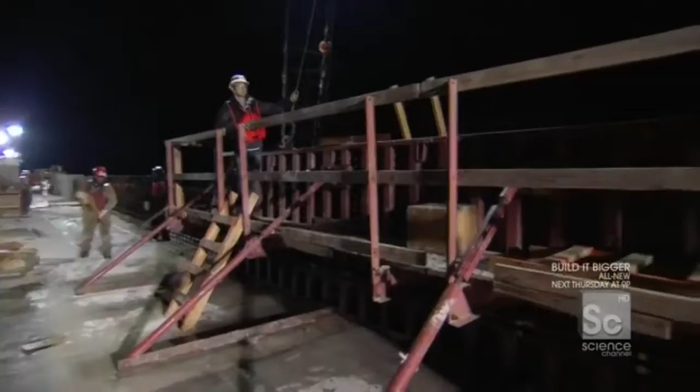Rick's putting a little bit of tension in the line to look at the shackle, make sure it looks right, they're even, they're not pulling, they're not buckling. If he's happy, we're going to get off it and start to lift. What do you think, Rick? It's holding good, let's go ahead and get down. All right, the formwork is ready to go. Crane has tension.

As it comes up, you'll get to see the exposed parapet for the first time. So just as we've gotten this thing off, we revealed the finished concrete wall, cleaned it, not a moment too soon. We're gonna pop it back onto the rebar and begin the process all over again. There's no time to waste here, is there? You're holding up the show.

Let's go. The most important step is to knock out the wooden blocks that form the parapet wall's wave-chopping notches. A couple of smacks, pop it up, take the pry bar, pry it off. All the while do it such that we don't damage it so we can reuse it on the next form. You got it, I'm on it.

Who needs a pry bar?

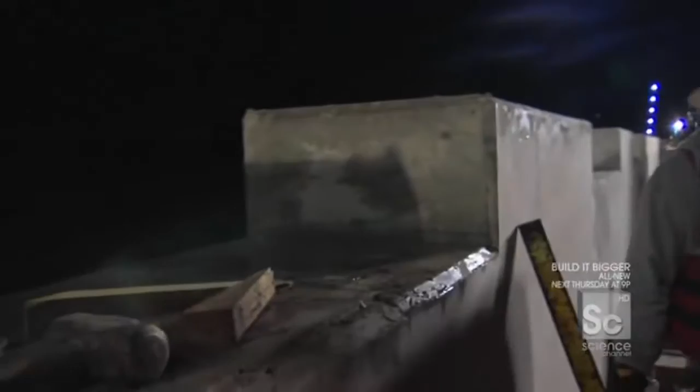This way it's supposed to come off and stay intact. Look at that nice edge. So we'll pop a couple more of these off? Pop a couple more, and we'll go check on the form, see if it's ready to go. I promise I won't break them. Take care of it.

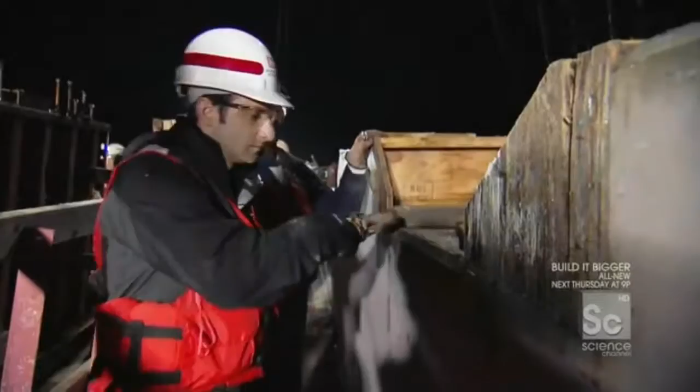Nice, smooth, 90-degree, notched out finish. With all 12 blocks removed, the wall is 36 feet closer to completion. Only a mile and a half to go.

Do you get that sense that after 5 years, New Orleans is beginning to get back on its feet? It's starting to get back. They ain't never gonna take it away from Louisiana. We still got it, we're just putting it back together so we can enjoy it again. And this wall's a big piece of that. It's gonna be a big part of it. Makes you kind of proud of what we're doing. Right now we got work to do, we need to get this done.

In just 11 months, the surge barrier will be operational, giving the people of New Orleans hurricane protection that they've never had, and the confidence to come home and rebuild in the city that they love.

See, this is my home away from home, and I just love looking at New Orleans. So, Miss Leggett, when someone who's not from here looks out and says, has New Orleans got a shot? Is it going to come back? I tell them yes. Good shot. Good shot.

Miss Leggett and more than 300,000 others have already returned to New Orleans to rebuild and transform their city. The recovery of New Orleans is a complicated issue. On the one hand, if you don't hold back the water, the city just won't survive. But beyond fortifying walls, it's also about building a community, a place people want to call home. It's part infrastructure, but it's also part dining room table. And what I found in New Orleans is that they're actually doing both.

8 miles from here, the new surge barrier will hold back the next Katrina. Here in the Lower 9th Ward, one of the worst hit areas, you're seeing more than just signs of recovery, you're seeing a full-blown redevelopment. The Make It Right houses are taking what they learned from the tragedy and transforming it into innovation. And that, in the end, is what real recovery is: taking the existing culture of New Orleans and transforming it into something new.